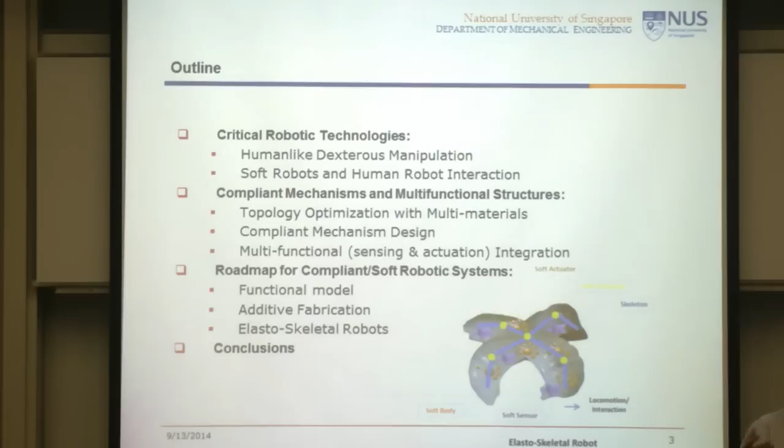So today I'm going to give you a very short description about some of the new robotic technology development areas, which I think are important. And I will give you some of my thinking or my background, where I have done some work in compliant mechanisms, and I will relate that to where I think some of the new development in hyperelastic robots might be related to compliant mechanisms.

As a mechanical engineering student, that's where I got my PhD, mechanical engineering. When I was a student at Carnegie Mellon learning robotics, this is how we started our learning. We look at the robot in terms of the kinematics first, then we examine the structure and dynamics, then we close the loop, put the feedback control into it, and then you would have an articulated machine, which we call the robot. Okay? And in this framework, the design and the development of a robot is very clear.

You start with the kinematics theory, which was developed in 1875 by Franz Reuleaux, that assumes that the key elements of your machine are rigid bodies, and they are connected through kinematic pairs, and therefore you will be able to have your degrees of freedom, you will be able to generate motion. And then of course you need the structural integrity, so you put materials into your structure, and then you would have your dynamics, and then you construct your feedback control.

So essentially through the forward kinematics, you decide what kind of body structure you need, either a serial connection or parallel connection. So that's the major part of the kinematics. And then through the inverse kinematics as well as the dynamics, you build your control law or control policy.

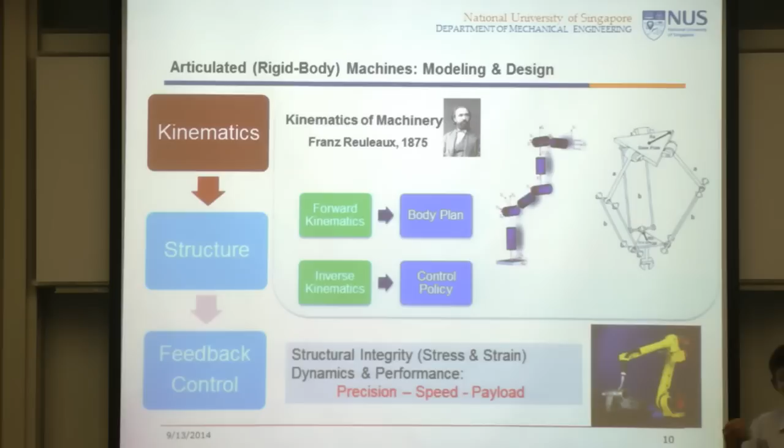So with that framework, we are very successful in developing machines, in building robots, in particular the industrial robots, where our performance goals are really the precision, the speed, as well as the payload. Right? And we are concerned a great deal about the structural integrity in terms of the stress and strain in the structure as well as the dynamics. So we are tremendously successful in developing those industrial robots and applying them in a variety of industries, in particular in automotive engineering. That's essentially what brought robotic technology to an industrial level.

However, if you look at this type of robot, when you want to make use of them to interact with human beings or be part of assistive devices that could be connected to human beings, you will find this type of technology is very awkward, very difficult to make use of. I'm sure you have seen some of the pictures before.

So particularly the whole framework of robotics design really looks at these three key attributes. You want the end effector to have fairly good speed at a given precision, carry a very reasonable load, could be as high as 100 kilograms. And essentially you care about the kinematics and dynamics as well as control. There are really very few concerns about the interaction with the environment.

Essentially, you let your robot run in a very much open loop fashion. When it runs into the environment, somebody is going to get hurt. Okay, so essentially, for industrial robots, you have to put a cage around it so that it will not really be involved in interaction with human beings.

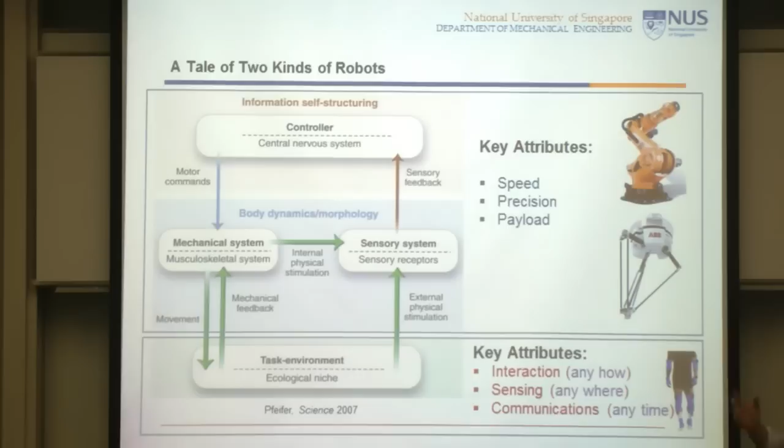Now, if we want to get the robots to interact with us or to help us, when we get into the interaction part, then the key attributes could be totally changed. We are looking at interaction, we are looking at sensing, we are also looking at communications. So in this new domain of robotic applications, the attributes are very different. Okay? The performance requirements are very different, and therefore the platform or the framework of the technology may have to be changed. We will have tremendous difficulties directly applying industrial robots to human interaction activities.

So one of the major ideas for getting robots to be compliant enough to interact with the environment, interact with human beings, is to put variable stiffness into our control loop. So you probably have seen some of the videos where the robot might be able to even punch the face of a human being without creating severe damage. And that technology was developed by the DLR lab in Germany, and there are only one or two brave souls on earth willing to take that test, right? And he's, of course, very famous now.

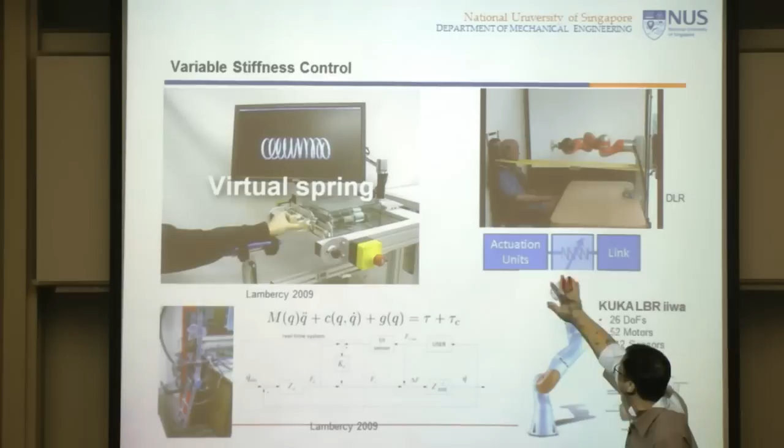And his technology is essentially that between your actuation unit and the end effector, you build an artificial stiffness. You build that element in, either physically or through your control loop. To be able to do that actively, you essentially need multiple sensors as well as very high bandwidth in your control loop to be able to regulate that.

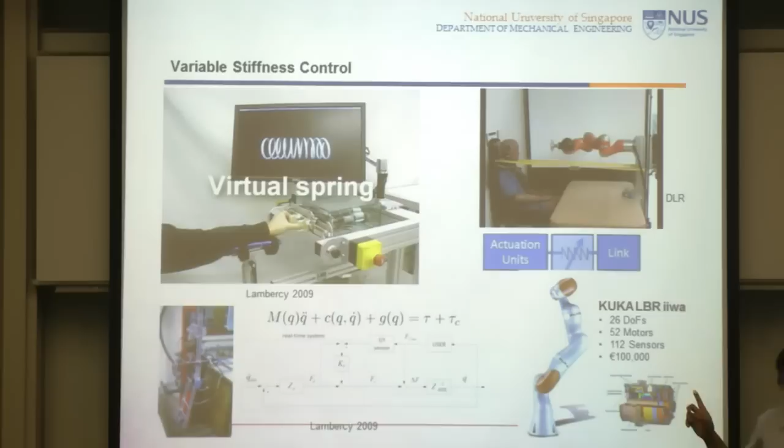So this technology now is transferred into a commercial product of a KUKA robot. It's essentially a 6-degree freedom robot, but it has 26 degrees of freedom internally altogether. There are 52 motors inside this 6-degree-of-freedom robot and 112 sensors. That tells you the complexity, and also the demand on your control system.

You really have to build highly elaborate control systems, control loops, relying on your sensing as well as the bandwidth of your system to achieve that kind of compliant behavior. The cost is fairly high, easily over 100,000 euros, and in fact only a limited number of these robots are now on sale. In Asia, KUKA is not planning to open the market for at least 3 years.

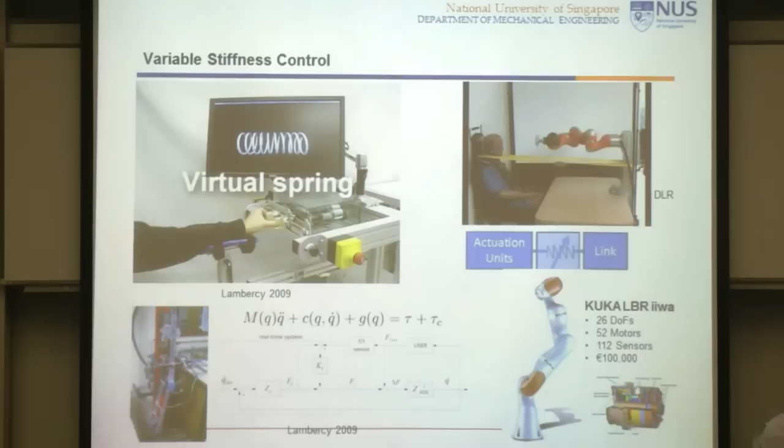However, in Singapore, through some personal connection, we got one of these under the first batch of government funding for robotics of 20 million Singapore dollars. So we have to figure out how to make use of it, even though it's very elaborate, very sophisticated.

So there is another line of thought: look at human beings and see why not make the robot compatible with the environment or with human beings in a physical, passive sense. If you look at the stiffness properties of some of our living tissues or living structures, you will find that the stiffness of typical human tissue is around 1 megapascal. Our cartilage, our muscles all have a stiffness around that number, which is extremely low compared to metal, for example aluminum, which is 10 times 1 gigapascal.

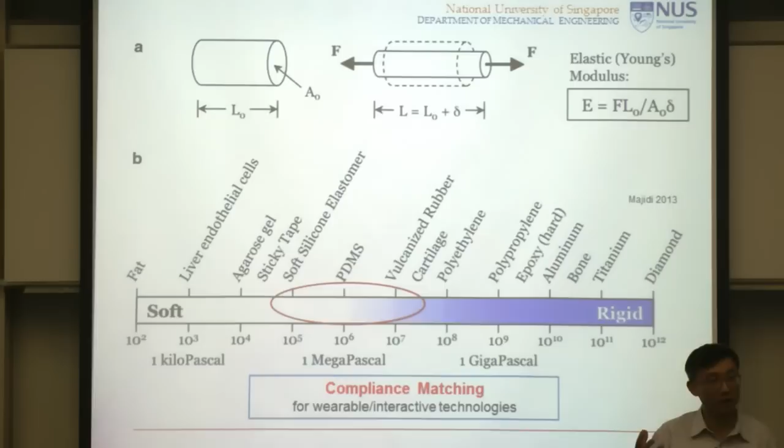So metals and all that are over here - this is what we normally consider as rigid bodies in the kinematic structure of robots. So if we make our robots out of materials with similar stiffness properties, essentially physically you would have what we call compliance matching. Then the material properties of your robot and the environment - all the creatures, animals that are interacting with your robot - would be in the same order of magnitude in terms of at least the stiffness property.

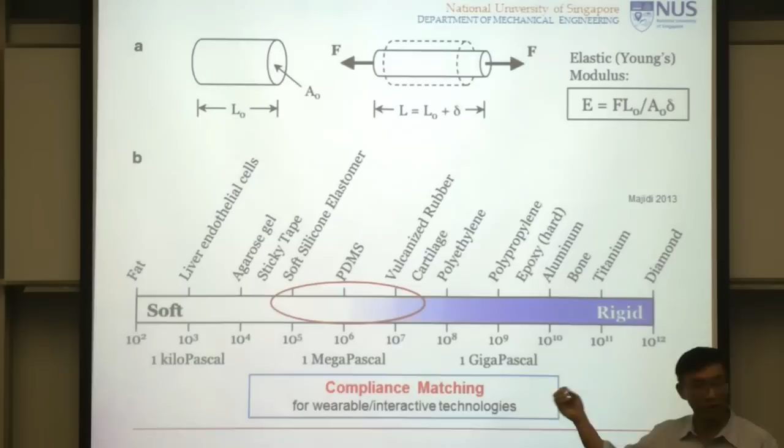So this is the idea that people think: should we build a robot or any machine that, when it interacts, has more or less the same stiffness? We might be able to alleviate all these interaction issues, or at least the damages.

If you look a little more closely at the technologies, there are a number of critical elements already in place. There are soft materials which you can use to create actuators. There are also soft materials we might be able to use as sensors. There are soft electronics being developed today. By putting some of these elements together, we might be able to create robots that have three attributes: being able to interact with you, being able to sense, and being able to communicate. That's the fairly rough idea of developing soft robots.

Okay, it's a very vague, very general idea. It's not very specific - there are a lot of issues and questions. Of course, number one issue would be actuators and sensors. Soft actuators are very different from electrical motors. And if you are able to develop these devices, what would be the machine you have to build? From that point of view, there are some latest developments that have gotten a little attention in the robotics community.

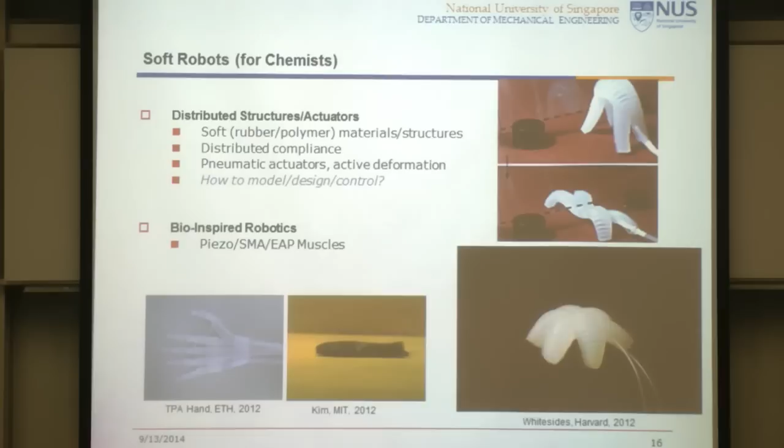Some of you have probably seen this - it's out of the Whitesides group at Harvard. He built one or two of these devices out of silicone rubber, actuated through pneumatic pressure, so it's able to move - in this case as a gripper, in another case as a locomotive robot.

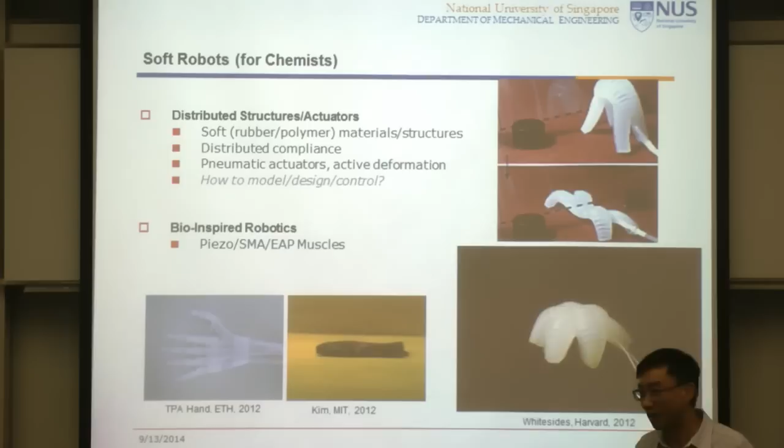And when this came out, quite a lot of people got very excited. They said, oh, this is the age of soft robots. When I look at this, I see that these are done by chemists - they happen to know certain processes and are able to put a couple of pieces together, and they call these robots. From my background, how I was trained as a graduate student at Carnegie Mellon, if you want to call these robots, you're going to have to see much, much more about it. So that's what I'm trying to say - if this is a robot, what are you going to have to do?

So if this is a robot, then what you have is a soft body. You may have a skeleton structure into it, just like traditional industrial robots. You could have rigid links with joints, and you can put motors over there, joint actuators, and you can also embed soft actuators, like pneumatic actuators or pneumatic bubbles inside your soft body. And then you might want to embed sensors. In addition to the joint sensors, you might also embed strain sensors, compression sensors, and stretch sensors into your soft body. And altogether, you might be able to say that you have a soft robot.

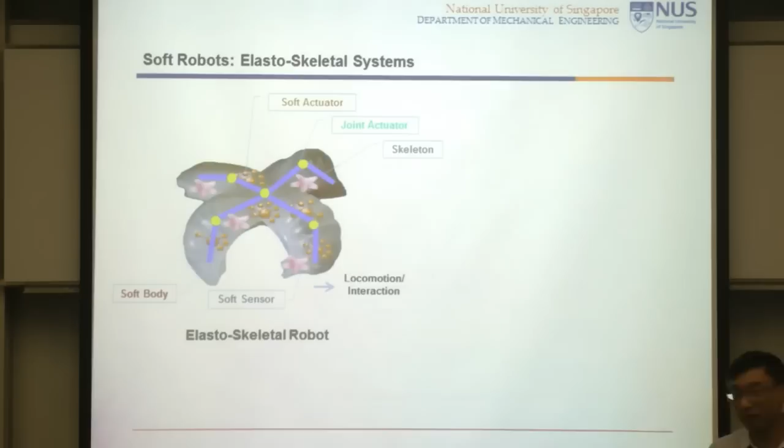But still, you need to be able to say what are the functions of this robot. Can the robot do locomotion, or can the robot do manipulation? So there is that side which is not clear in the first picture I showed you.

And if you look from that perspective, this is very different from what I learned in the design of industrial robots. So you're going to have to ask questions about what is the kinematics in this robot, what is the dynamics, and what would be the right control.

Can it grasp or can it manipulate? What kind of things, what task can it accomplish? So from that perspective, I started to think about what would be the framework in terms of design, analysis, as well as control of such a robot.

Of course, you have to be able to build such a robot physically to fulfill that. So to me, from a mechanical engineering point of view, from a mechanics point of view, this robot is really a structure. If you simply ignore the skeleton system inside, you really have nothing but a piece of material. It's essentially a structure that happens to be able to deform with large deformation if that is what you want, and it does not really tell you much about the functions of the robot.

What kind of task you're able to accomplish, you need to be able to analyze that, you need to be able to model that. So the key element for me, the key issue, is to be able to design and model such a system, and then come up with approaches for design, for analysis, as well as for control.

So I'm stepping back to the very fundamental level, looking at this as a system of a structure, and trying to make the structure behave as a machine to give us the desired function we want. So along that line then...

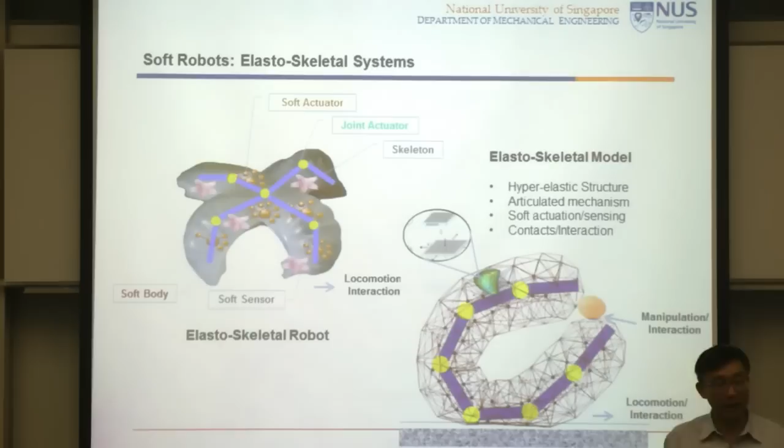Essentially, the manipulation you are able to achieve is the interaction of a part of your structure with an object in the world. Locomotion would also belong to the interaction of a part of your structure with the ground, for example. And it's just that in the rigid body robot, we call these interaction parts feet, and these interaction parts hands or fingers.

Here, of course, you can deliberately designate part of your elastic body as fingers and as feet, but essentially now it's a continuum structure that happens to be actuated and controlled to accomplish certain tasks.

So when I look at all of that, I realize this kind of thinking is actually being discussed and simulated in computer graphics. So here at Carnegie Mellon, Nancy's group has done wonderful work where they modeled a Michelin man as an elastoskeletal system—a rubber-coated person with a skeleton system inside—and she developed controllers to make the man dance on the floor, as well as some other similar structures.

And at Georgia Tech, Karen Liu's group also did some work in terms of simulation, where she would treat it as a machine—she doesn't necessarily call it a robot—inside that piece of jelly-looking structure. She assumed there are some tendons, and these tendons could be contracted if you command it, and under the contraction of the tendons, this jelly piece would be able to dance and move forward, as well as some other structures being able to do other work.

So in fact, the concept of a soft robot or hyper-elastic robot is already there, although this is just virtual. The actuations and sensings are pretty much assumed to be there or assumed to be functional, and nothing has to be built. So for me, I would think it's a very good idea, a great idea.

If we are able to build them, more importantly, if we know how to design them—why should it look like this? Why should it look like the Michelin Man, right? What would be the right body structure, just like the articulated kinematic chain we use for rigid body robots.

These are the issues that I think are important and need to be examined very carefully, and then perhaps we would have a framework to allow us to build, from the ground up, elastic or hyper-elastic robots. Of course, we need technology elements like actuators and sensors, and those definitely need to be put in place.

So if you look at that, what we are really looking at is a system where we need to worry about design, modeling, and control. Design at the very front, where you need to worry about the body type, skeleton, articulation, and what kind of sensors and actuators you need to build into your system.

Then, of course, you need to relate to the task you want to accomplish. You design your robot for a particular task you need it to do—it might be locomotion, manipulation, or simply interaction, like shaking hands with a human being. Once you have that, you need to build your controller to deal with the hyper-elastic material properties as well as dynamics.

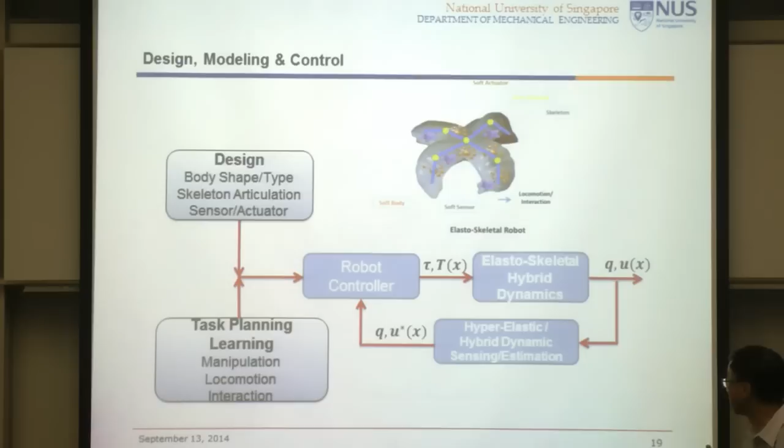Essentially, this is a highly distributed system because it's a continuous system, and you need reasonably designed controllers to handle the complexity of the dynamic system. Part of that is already being discussed by the computer graphics community, interestingly. So what I'm going to show you is that most of these fundamental analysis tools are already in place—the fundamental mechanics are already in place.

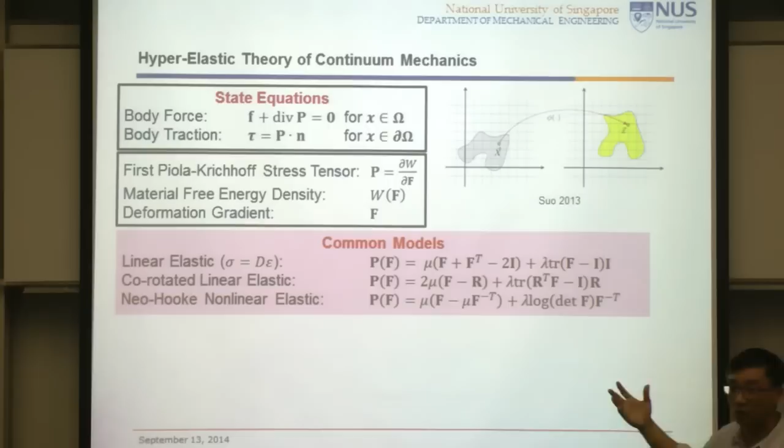In terms of the hyper-elastic body, the mechanics is well understood. We're so used to the kinematics of a robot, but in terms of the elastic deformation of any type of hyper-elastic material, you can easily build a model that allows you to analyze it. I won't get into the details—this is related to continuum mechanics, nonlinear continuum mechanics of large deformation of a piece of material.

In fact, in the medical simulation area—simulation of tissues, body parts, as well as surgical operations on body parts—as well as in other areas such as articulated characters and balloons, this simulation and analysis has been done by Disney Research in Zurich. So fundamental work is already done—we can easily model any type of structure that can undergo large elastic deformation.

On the actuation side, pneumatic actuation of soft material is fairly common and fairly general. It's just that it's not electric, meaning you'd have a relatively large supply system. Pneumatic actuation is also a mass transport, so it's not very efficient, not very high power, and very slow. To come up with actuations that are more practical for robotic applications, we really prefer using electrical control.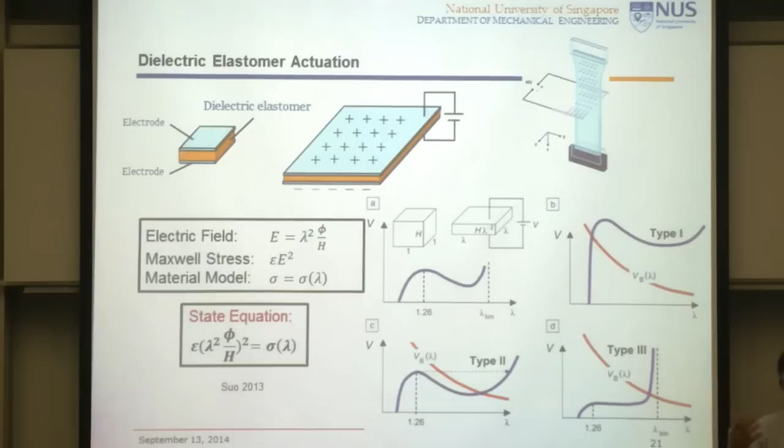Over the last 10 years or so, a group of researchers—in particular at Harvard—has done scientific analysis on the behavior of dielectric elastomers. Today we know very well about the behavior of this type of material, and you can build actuators, although they're not very easy to use. I'll tell you some of the practical limitations, and there are a great deal of models being fully developed, but we don't need to get into the details.

In terms of control, the framework is also well developed. Essentially, it will be an optimization-based system where you have your objectives, and you have to deal with the full dynamics of your hybrid systems. In particular, you need to deal with frictional contact where your robot may interact with objects or with your environment. Frictional contact is part of the classical problems in robotics grasping—normally we'd apply the complementarity principle, and that would allow us to fit that into a control loop.

And of course, then you need to have lower level controls, such as momentum control, gait control, and base control if you are looking at a hyperelastic robot. So essentially, this is what Nancy and some others have done in computer graphics. They have come up with relatively robust, fairly efficient control laws based on optimization controls, to be able to give you that kind of simulated performance. So to me, all these elements are more or less in place.

Okay? And the only question that fundamentally has not been answered to me is the design. So now, what is the kinematics of this robot? Dynamics, I can write down the dynamic equations. So how do you describe the motion behavior of a piece of elastic material?

Okay. If you're a mechanical engineering student, if you have taken some of the mechanics classes, in mechanics classes they never talk about motion. Structure is not supposed to have motion. Structure's mobility is zero. That's what we learned. Now, you want to have motion out of a structure. So essentially, you're taking strain or displacement or large displacement at some part of your structure, and you want that displacement to function the way you want it from the robotics point of view.

So that part is what I began to focus on, and there are a lot of words here. I will not get into details. So essentially what I'm trying to say is that compared with the classical framework of kinematic or motion analysis of a robot, not much has really been developed for a continuum structure or hyperelastic robot yet. So we need to come up with a system, an approach to answer that question. That's where I started my work.

So in fact, the work started not in a general robotic sense. My work was more related to mechanisms. Similar questions were asked in mechanisms, where people have suggested not to use rigid links, but rather use elastic members or an elastic structure to come up with a mechanism that's very much similar to a rigid body mechanism. So it's called a compliant mechanism.

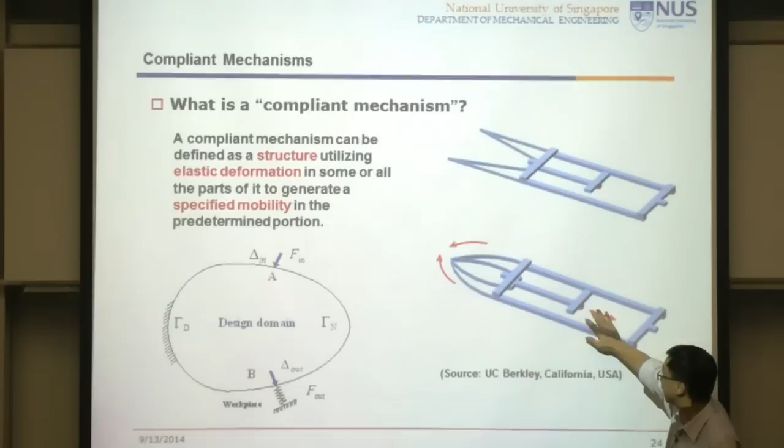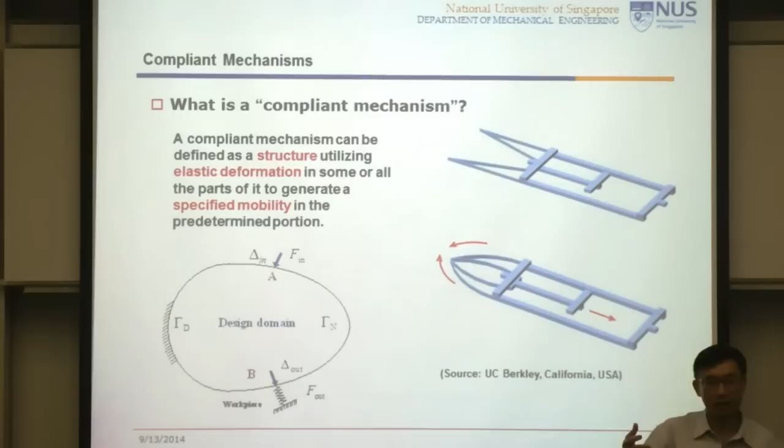So the idea there is really very similar to the issues that I had just talked about, although it's a little bit simpler. There we are looking at an elastic structure, and to some part of the elastic structure we are giving actuation, and at the other part of the elastic structure we have large displacement, which would mimic the motion of a rigid mechanism. So essentially, again, it's a structure where you have certain input at some point, and at certain other points you want to have certain displacement behavior. So that is what is required.

So along that line, there are a number of different approaches to deal with this. Compliant mechanisms have been around for about 20-some years. They have found very good applications in medical instruments as well as in morphing wing structures. Today, there's a great deal of development of morphing wings in aerospace, and quite a lot of ideas are based on compliant mechanisms, where you want a piece of structure whose shape you can change, but which is rigid enough to resist the thermal and aerodynamic loads. So that's one of the areas of application where compliant mechanisms are being used quite extensively.

So from that perspective, it's really much the same issue that I asked myself, where if you look at classical mechanism design, it's all based on Reuleaux's theory of kinematics, where you have rigid bodies, you have kinematic joints, and now you are going to fully replace rigid bodies and joints with just a continuous body. And how do you develop your mechanism? So the framework now is very much based on the idea of optimization.

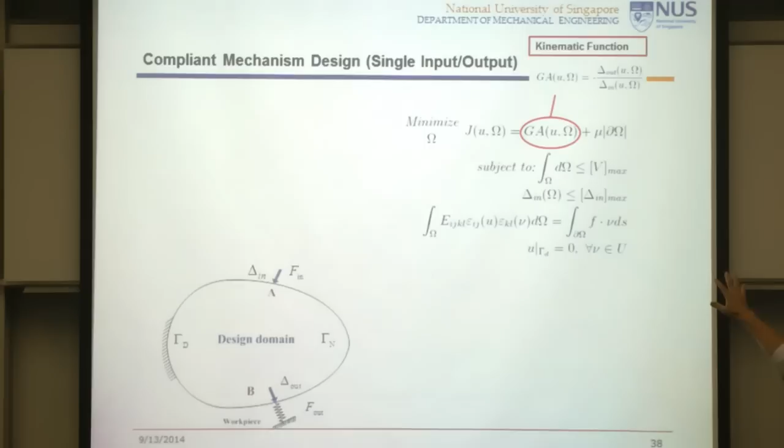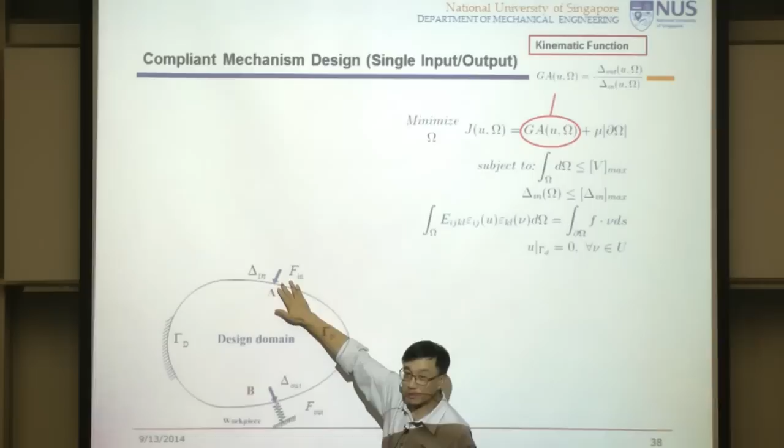Okay? So I would have an objective function, which I flashed up there already, where I define certain displacement relationships. For example, the output displacement at one point versus the displacement or force at the input. I want that to be as large as possible, but my system is confined to an elastic structure. So essentially, I need to work with structural mechanics. I cannot ignore that at all. That's all I have, but I want this structure to have certain behavior in terms of a function, which I need to maximize or minimize.

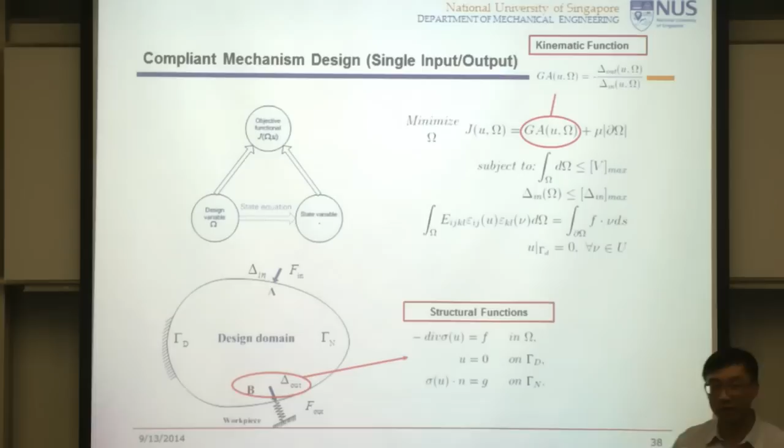So I cast everything as a structural design problem. So designing a robot or designing a compliant mechanism now becomes the design of a structure. It's structural optimization. Okay? So I will get to that very quickly. I will show you some results. Then I will come back to say whether or not this might lead us to more generalization into the design of a hyperelastic robot.

There will be a great deal of details which I will not be able to get into. Structure optimization by itself is a big discipline. It has quite a lot of people getting involved. The majority of them are from aerospace, and nowadays mechanical engineering people are also getting involved because of the potential applications.

So one of the approaches that I have taken is to look at the structure and define the structure by a level set function, such that I'll be able to describe the boundary of the structure and also be able to change the boundary of the structure in any way I want. In particular, I'll be able to change the topology of the structure. So this would allow me, through the optimization, to come up with the best topology of the structure as well as the shape of the structure.

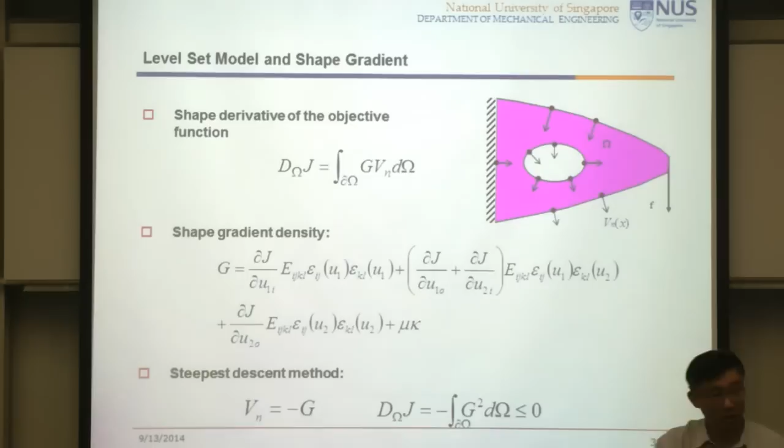So I use the level set technique, which I will not be able to get into the details of. There are a lot of equations. So essentially, you start with the structure, and you're going to change the boundary of the structure. But as you change the boundary of a structure, you are also able to change the topology. In other words, I'll be able to create more holes, merge holes, and get the shape to change in a very dramatic fashion.

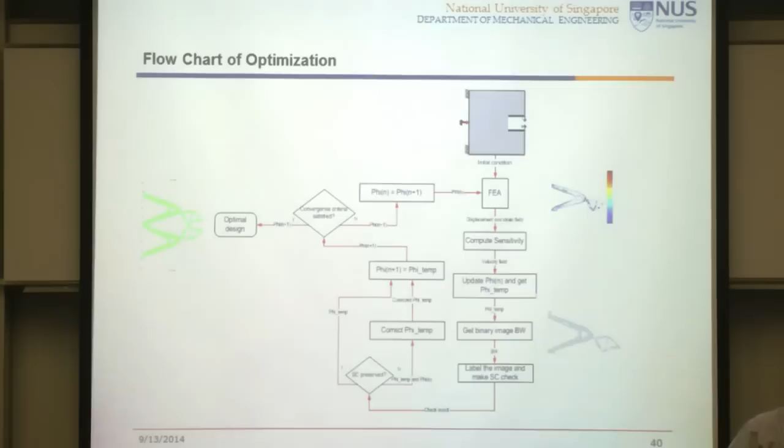Okay, so I will be able to come up with an optimization system. Typically, it's an iterative process. We start from an initial design and go through the iterations. In the end, I would come up with a final structure which gives me the required performance, in particular, the relationship between the input and output displacement. I will ignore all the details; it's going to take too much time. So just to show you a couple of examples.

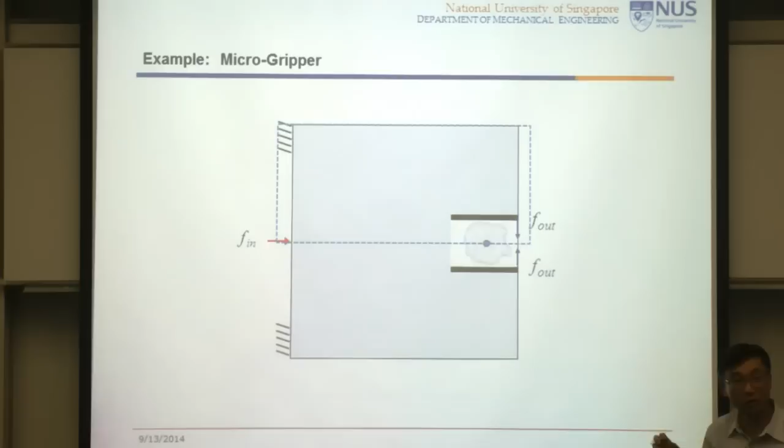These are the compliant mechanisms. So this is what we call a micro gripper. The concept is very simple. I want to design a gripper that would have a range of motion in micrometers, and which might be able to grab a biological cell, and so on. And the gripper needs to be small, so I'm going to just build the gripper with one piece of material as the structure. So it behaves like a gripper mechanism, but essentially it's a structure.

So for the design here, I took the top half of it. It looks very strange. It's a 2D design. For the top half of it, I started with a lot of holes. And then gradually it removes the material and combines all the holes, and eventually gives me a structure that allows me to have the closing and opening of that jaw. On the right hand side, that's the level set function, which for now you can simply ignore.

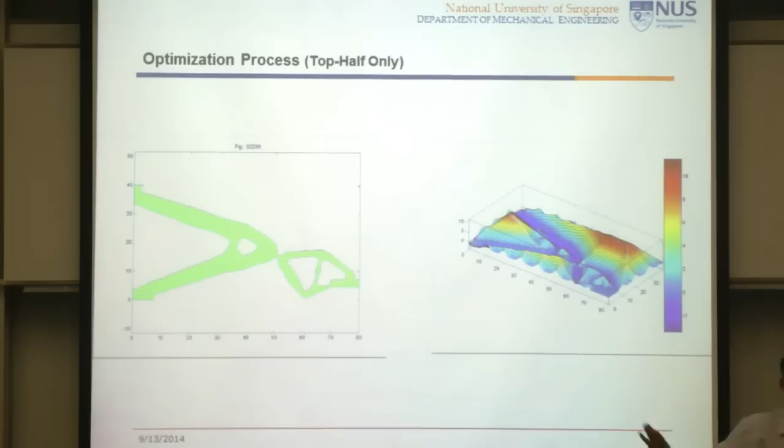Okay? So essentially what I'm trying to say is that the level set function, if you look at it, is nothing but one continuous function. And the structure is the zero set of that function. That's why you see a lot of holes, different sizes of holes, and you also see the change of the holes. Because you operate in here, you optimize in here, your structure is embedded in there. So that's the advantage of that. So that's a very simple result.

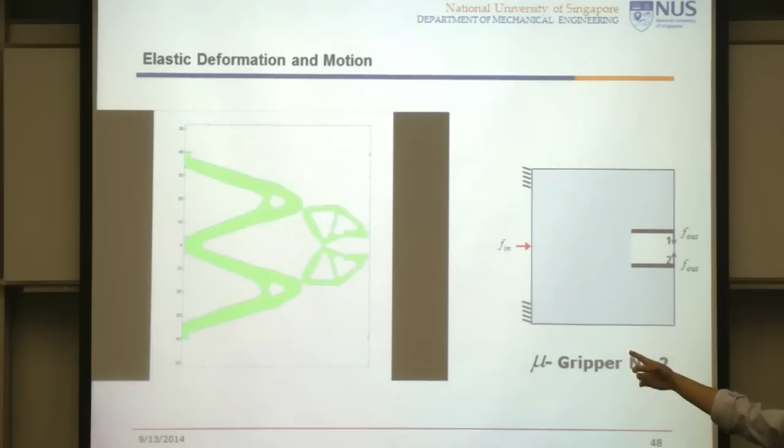That's a micro gripper. So when you pull one of the ends, the two jaws close and open; really not that fancy. But it's a compliant mechanism. There are no revolute joints, no sliding joints. So essentially you don't have the issues with backlash or friction. And this could be easily fabricated, in particular with today's wide applications of 3D printing, and you would be able to fabricate these kinds of devices very easily.

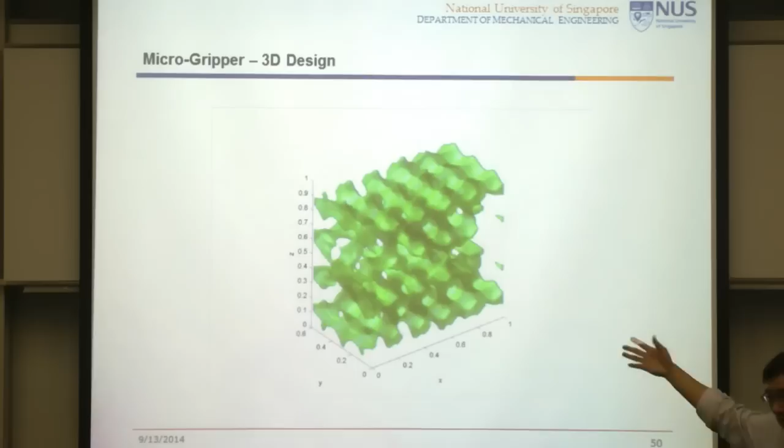And you can, of course, generalize it into three dimensions. So here's one of my former PhD students who came to the US, and he did the three-dimensional version of the same problem. And you would end up with a 3D version of a simple gripper as well.

And the design process is purely computational. It's all based on optimization functions, which define the behavior you want, and the constraints, which essentially say that it is a continuous structure. And the level set model allows you to change the geometry very much arbitrarily, so that you would eventually converge to whatever the best design is. Okay? So that's essentially what we've been doing.

And we also look at the possibilities where you might want to make use of multiple materials, instead of just a single type of material. So over here you have a green and blue.

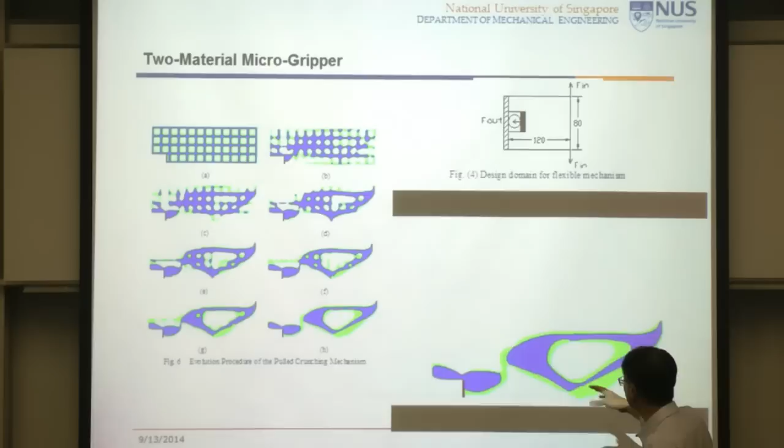Blue is a stronger material, green is a softer material. So you may ask questions, well, what if I use multiple materials? What kind of a gripper might I end up with? So you see over here, this is where you will have large bending or large rotation displacement, and the most soft materials are put in place, but all other places are more like what you would have for a single material.

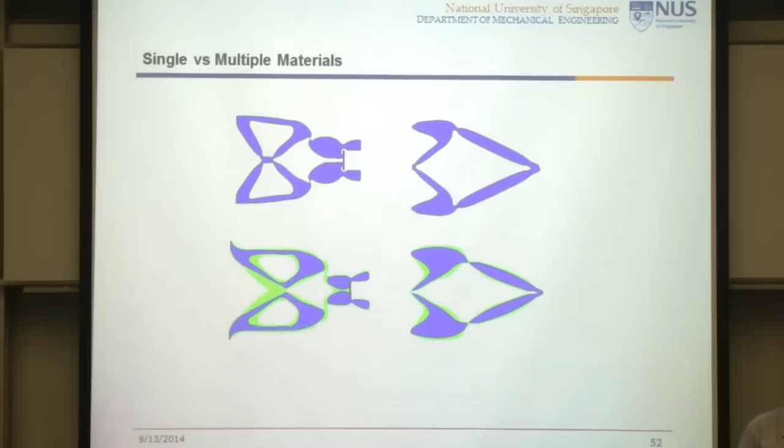And so this would be a similar set, one material versus two materials, and essentially there's really not much difference as far as simple compliant mechanisms are concerned. So using multiple materials, using softer materials versus harder materials, in this case the only difference is where you have a large bending, then the soft material tends to go there. Okay? And we can also have multiple functions.

So over here, it's just a simple example where you have a vibration harvester undergoing compression and elongation. What you want to do is to recycle that vibration motion and generate electricity. So therefore, in your structure, you would have some piezo materials that under compression would be able to generate electricity. So the question is, what would be the right structure where you have the structural part as well as the piezoelectric part? The piezoelectric material is shown in the red color.

So you need to have a right balance. If you have too much of the piezoelectric material, you won't get much of the deformation. Okay? But if you have too little of the piezoelectric material, then you will not be able to generate electricity. So piezoelectric material is fairly hard. So when you mix these two, what would be the best balance such that you will have the best efficiency?

So what essentially we are trying to show here is that you can have different materials with totally different functions, and they could be mixed into this optimization framework, and in the end, the best design would be given to you. So multiple functions could be generated. It's just an example to show you that. Okay. So that's about all there is in terms of compliant mechanisms. That's what we have done. We have done compliant mechanisms in 3D and in 2D.

We have another program now. We are building materials that have negative Poisson's ratio for morphing applications, so that it has some good properties. So we'll not get into that. And then we look at that and say, how do we generalize this into our hyperelastic robots? And it turns out that it's still very, very difficult. This is all we have done. We have not been able to move any further.

But in terms of materials, in terms of building this type of soft robot, it's actually not hard at all. Okay? If you get some silicone rubber, you can easily mold them into a gripper like what Whitesides has done. And you can build pneumatic chambers, and you can pump air into it. You can see the grasping motions.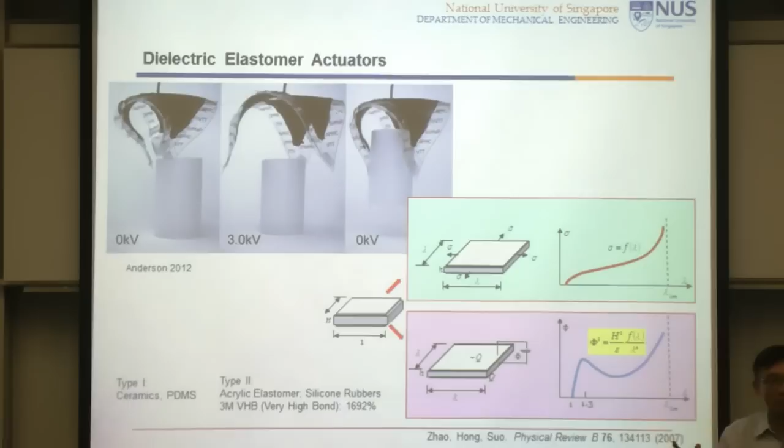But these materials behave mechanically very much like elastic materials. When you apply stresses, they will basically give you strain and elongate very much. Electrically, the behavior is a bit more complicated. There are a number of different failure modes: rupture, electro-mechanical instability. So essentially you will get a curve like this. But the worst part from an application point of view is this problem, where you need a pretension on the material. Then you apply voltage, and they will expand, acting more like an actuator.

But if you start from here without any pretension, if you apply voltage, nothing would happen. Okay, so the electrical charge would simply become heat dissipating on your material. You can easily burn it. Actually, we have seen fire on the dielectric elastomer. So pretension is a very big problem.

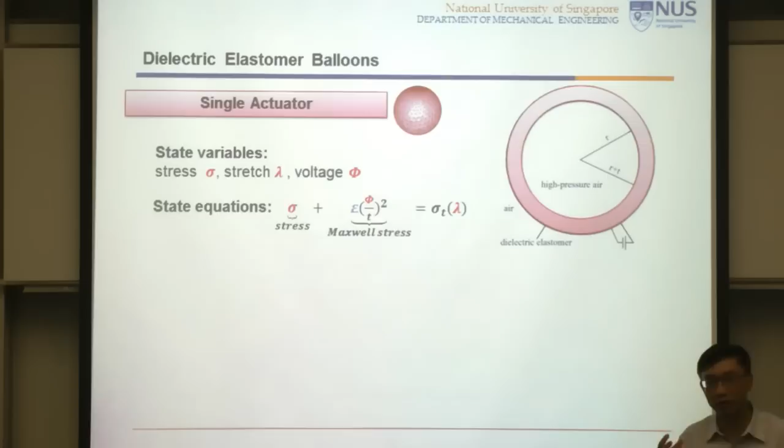So how do you put pretension on a piece of elastomer where the structure supporting it is elastic as well? Okay, you can easily put the elastomer under tension onto a rigid body, but on another elastic body, it will create compression on the supporting structure as well. So everything would crumble together. So having this is really a nightmare, and that's why the dielectric elastomer actuators have not been very well developed and used.

So one of my students now is working on a bubble actuator. Very simple idea. The pre-tension would come from air pressure initially inside a balloon made out of a dielectric elastomer. Okay? So as you then apply charges on the surface of the balloon, it will be able to expand, but the internal pressure would drop. So your performance would gradually deteriorate. So you would have only a limited small window where the actuator might be able to operate. So that's where this design needs to be worked out.

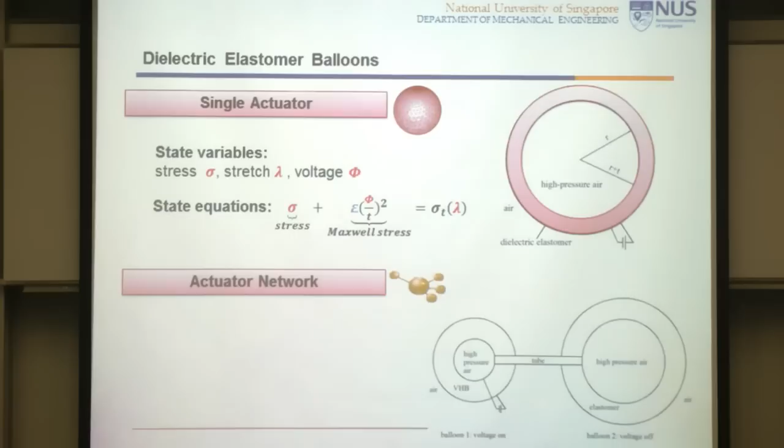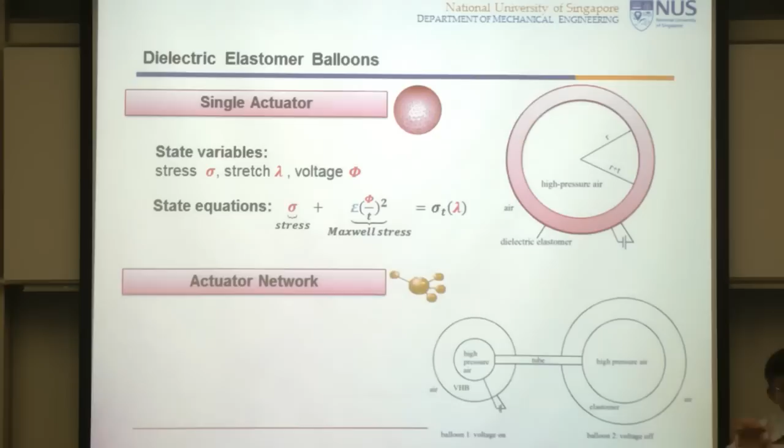But the nice thing about it is that if I can build the balloon actuators, I can really embed them into a soft body as an actuator, or I could distribute multiple actuators inside the body. And furthermore, I can build a network of these actuators. So two balloons could be connected through an air channel. They would actuate differently, but through the internal air channel, you will get more complex behavior. So it would give you more authority over your control.

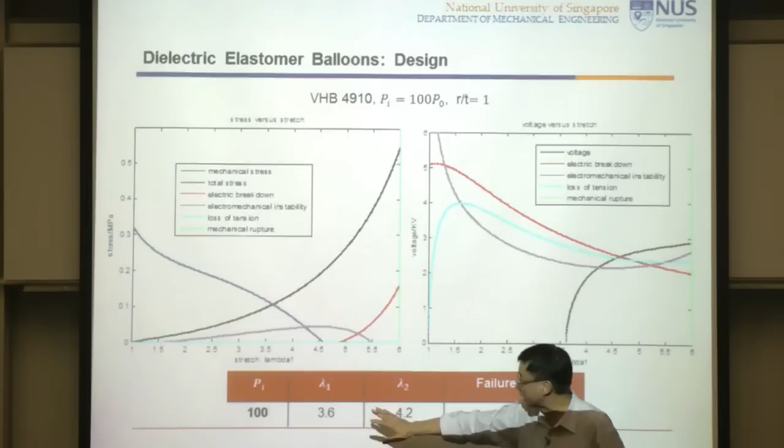So building this now is still a challenge, but the analysis, I will just flash this at you very quickly. The mechanical part, electrical part, throw them all together, and we will be able to stretch it under these parameters about 30 to 50%. I don't have a chart over here. Essentially, what it says is that initially you are at some pressure at some point, and you are able to operate in a certain range until you hit one of the limit lines, either electrical, mechanical breakdown, or rupture, or you essentially lost the pressure.

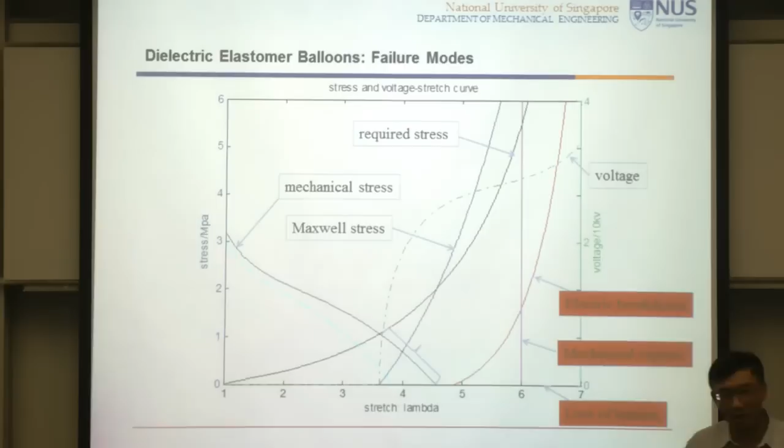So you have a limited window, but by carefully tweaking all the parameters, there will be a right size of balloon with the right thickness where you will be able to expand about 30 to 40%. So this is where we are still working on. But how to build that, we're not sure yet.

The biggest problem we are facing now actually is electrodes. Okay? So you have the hyperelastic material, the dielectric elastomer, and you need an electrode on one side and an electrode on the other side. These electrodes need to be flexible as well. And there are very few choices of flexible electrodes. So development of flexible electrodes is now actually much more critical, at least in our application.

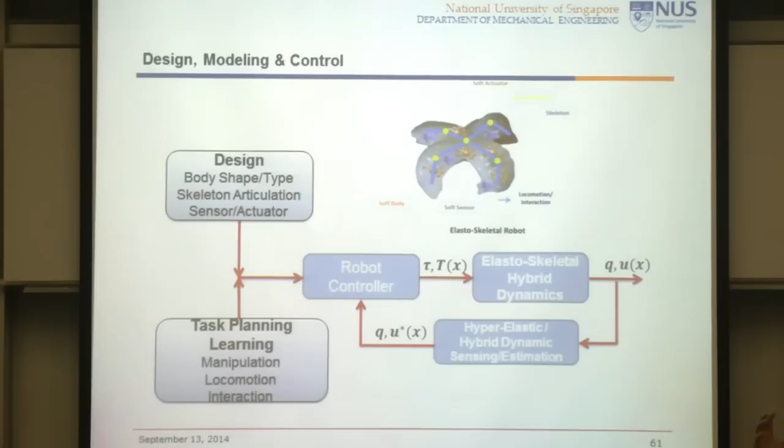So that's essentially my research focus on soft robots or hyperelastic robots. At least in my mind, I think there are major issues, in particular from the design point of view. What would be the right body? How do you model it? How do you create the motion you want? And when you get to the control part, it's getting far more complex.

The interaction of your robot with the ground and also with your object. In terms of manipulation, that interaction is very crucial. In terms of locomotion, the gait control and frictional behavior all need to be fully considered. So all of that is up in the air, and hopefully more people are getting interested in this area. So I'll just leave you at this point. I have more questions than answers, but that's all I have done, right?

So in my mind, soft robots or hyperelastic robotics still have quite a lot of room to grow. There is great potential, and the key bottlenecks today are the materials themselves, as well as actuators and sensors. So the devices are not there yet, and design methodologies are not there yet. And more importantly, a lot of people ask me the question about applications.

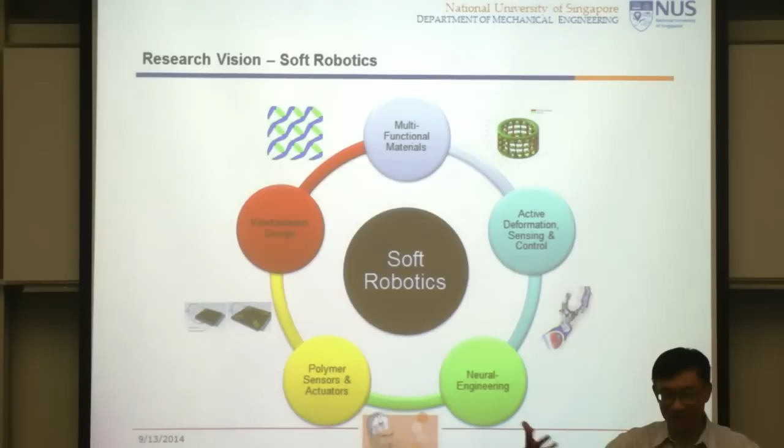What are you going to do with these robots? For now, all I can think of are the picture of Nancy's simulation, this Michelin man, and this jelly jumping simulation. So I told my students, if we are able to build these robots, if we're able to drive them electrically, a dancing Michelin man would be impressive, I would think, right? So we will see what other applications we might come up with. It's still in a very infant stage.

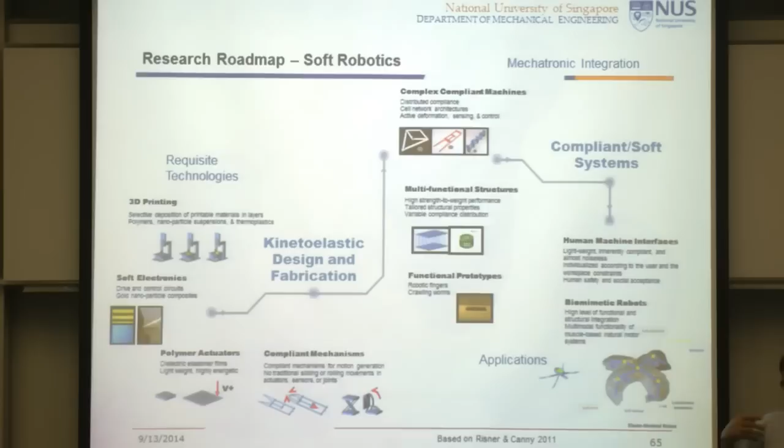So that's pretty much all I have. I have a roadmap for how to get there. Part of the issues are the integration of electronics with the materials. We have a number of technologies today, especially 3D printing. So I think 3D printing will play a role in the fabrication of these robot devices. And with that, I would just say that it's fairly preliminary. There are fundamental issues that need to be looked at.

And I also need to mention that there is a group of researchers, pretty much in Europe and in Zurich, and they are much more interested in intelligence embodiment. So Rolf Pfeifer's group and some others, and they're sort of trying to connect with the soft robotics community and answer some of their questions. With that, I think I will just stop here.

I'll just mention some of my students and some of the collaborators. Over the years, when I've been in Hong Kong, we have had some small grants. Typically in Hong Kong, as a researcher or professor, our equivalent of the National Science Foundation allows us to write one proposal a year. I cannot submit two. The typical grant size is about $100,000 US altogether for 3 years, so you can only support one graduate student on each grant.

But luckily, I had some grants from China. There's a lot of money there, and if you are able to tap into those resources, they also have a lot of students. But Hong Kong and China are one country, two systems. Money is not allowed to cross, so I have to go to China to supervise students to do the project. And now in Singapore, we heard the government is going to put quite a bit of money into robotics. Hopefully I'll be able to tap into some of that to do some work on this basic research. That's all I have. Thank you.